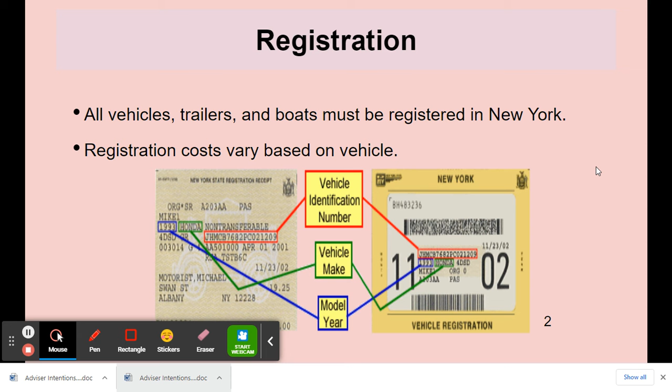All vehicles, trailers, and boats must be registered in New York. Registration costs vary based on vehicle. And I want to say they vary based on location in New York — I think downstate it might be more or less than upstate. Don't quote me on it, but I think I saw that.

Now, this I think is something very important for young drivers, so that they know what happens, what the rules are, and what are the consequences if you allow your vehicle's registration to go out of date. If you are pulled over and have failed to renew your vehicle registration, it is considered a non-moving violation, so you won't get points on your license. Although no points will be applied to your license, you will in fact be fined. There's a fine attached to it.

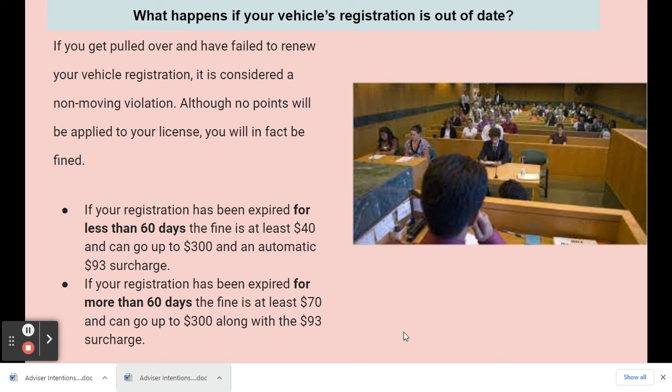If your vehicle's registration has been expired for less than 60 days, the fine is at least $40, and it can go up to $300. And an automatic $93 surcharge will be applied at the court. If your registration has been expired for more than 60 days, the fine is at least $70 and can go all the way up to $300. And again, be aware of the $93 surcharge at court.

Someone may ask, and this would be a great question for you guys in the breakout room, to figure out whether or not you will be charged a $93 surcharge for the court if you plead guilty on your ticket.

I almost want to say that the $93 surcharge is only if you plead not guilty and you go to court. Interestingly, we pay $93 for the service of the court to prove that we're not guilty.

Kind of strange. Okay, New York State inspection. New York requires all vehicles to be inspected yearly. No reminders are sent by the DMV. It's up to you to know when your inspection is due. If you take your vehicle regularly, once a year at least, to a mechanic for a checkup, they often will remind you of this.

You also may take your vehicle twice yearly to your mechanic to change its tires. If you're changing out summer tires or all weather tires to winter tires, that's also a great time for your mechanic to do the safety inspection for your vehicle. He's already there and he's going to have to check out the brakes and so on anyway.

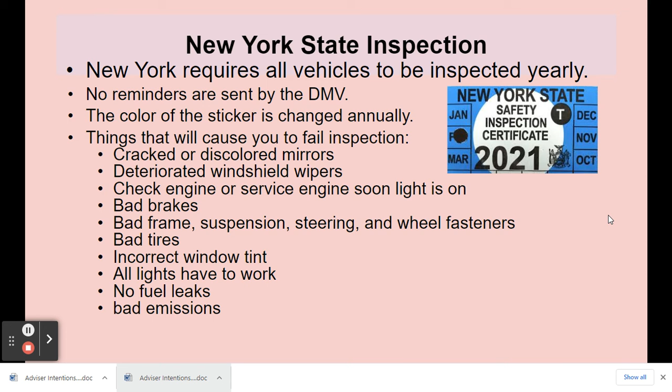The things that will cause you to fail your inspection are cracked or discolored mirrors, deteriorated windshield wipers, check engine or service engine light turns on, bad brakes, a bad frame, suspension problems, steering problems and wheel fasteners, bad tires, incorrect window tint. All lights on your vehicle have to work. It's a great time to get them fixed. No fuel leaks can be allowed, and also they do check emissions, which is a big part of the inspection process.

What are the consequences for not having a current inspection for your vehicle? If the inspection sticker on your vehicle has expired in the last 60 days, you can receive a fine, it says 25 to 50. If the inspection sticker is expired for more than 60 days, it can be between 50 and 100.

We got a little bit of different information, conflicting information here. This definitely is more recent, guys. I actually took this from a law firm, that's where I got this. If there is no inspection sticker, the fine is between $50 and $100. A mandatory state surcharge of $88, or $93 in towns and village courts, is added to the fine. So that's where the difference was. Okay, so $88 is...

City courts. So this would be, well, we can't tell from this picture, but this is what court looks like, guys. So we even have police officers here giving their testimony, and all the other people in the room are either in there for a violation, or they're a relative of someone, or a lawyer for someone who committed a violation, or is charged with a violation, I should say. And of course, here's the judge.

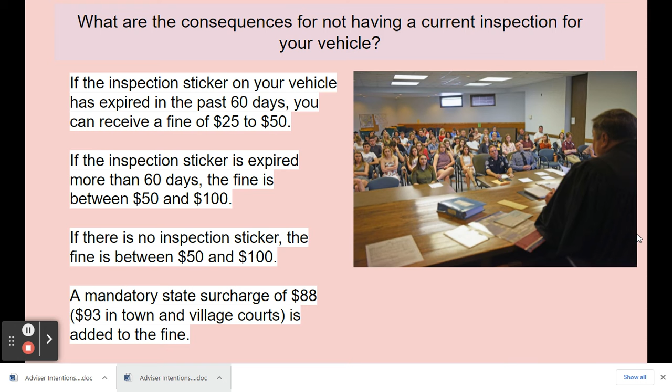What happens if you were given a traffic violation ticket? So, new driver probation, let me just go over really quickly what's going to happen when you get pulled over. So when you get pulled over, the first thing you want to do is signal, use the signal, mirrors, observe, and then go. You're going to pull over to a safe place on the shoulder of the road. You should do this rather promptly.

The officer should not flash his, I don't know what to call those, the police lights, until he or she knows you're going to be in a safe place where you can pull over. He is expecting you to promptly pull over once he does shine those police lights.

When he does pull you over, you must stay in your vehicle. Do not leave your vehicle. I'm telling you the proper etiquette for this. Do not leave your vehicle. Roll down your window when he comes to your vehicle. You do not need to roll down your window beforehand, because it might be bad weather.

He or she, the officer, is going to ask you for two things. They're going to ask you for your license and your registration. You can get these prepared for the officer before he or she comes to your vehicle. The sooner that you have them available for the officer, presumably the sooner you'll be able to go on your way. The officer is always going to ask, do you know why I pulled you over?

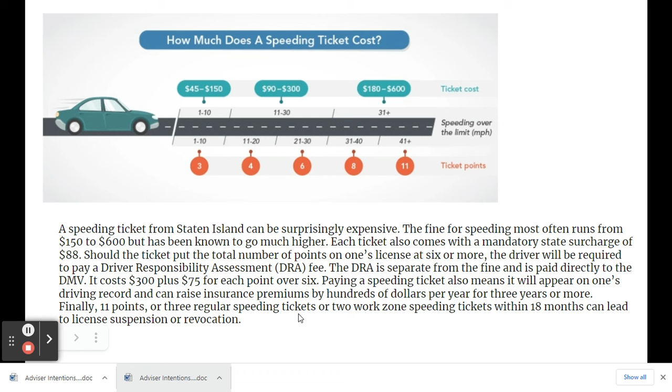For you guys it's different, but once you have your full driver license, which is your aim in this course, 11 points is your max in 18 months. Anything at or over that results in suspension. And it's not in 1 year, it all kind of renews over 18 months, it's a running type thing. So at any point within 18 months that you have 11 points, or 3 regular speeding tickets, or 2 work zone speeding tickets, your license will be either suspended or revoked.

Okay, speeding ticket data from Staten Island, New York. Nearly 20,000 speeding tickets were issued to drivers in the borough of Staten Island in 2018, slightly more than 2017. Police in Staten Island issued the highest proportion of speeding tickets of any New York City borough.

21.7% of all tickets written in 2018 were for speed-related offenses. Among those, 12.7% received companion tickets, for example a second ticket in addition to the speeding ticket. That could be for something like registration being out of date. The most common were for licensing violations, such as driving without a license, equipment violations like having a light out, and disregarding traffic controls.

Approximately one-third of drivers ticketed for speeding are from New York State. The remainder are from out of state or Canada.

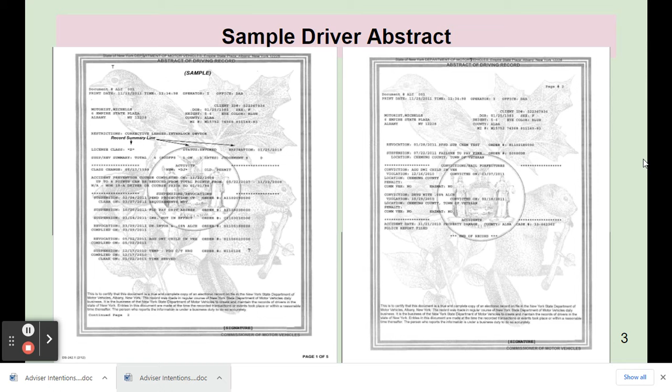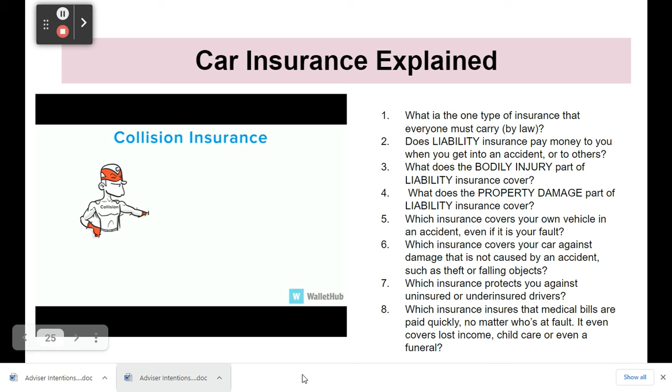Collision insurance protects your own vehicle after an accident, even if you're the one at fault. You will be required to buy it if you use a loan or lease to obtain your vehicle. Otherwise, getting this protection for your own car is your choice.

Comprehensive insurance protects your car against damage not caused by an accident, such as theft, falling objects, or natural disasters. Which insurance covers your own vehicle in an accident? That's collision. Which insurance covers your car against damage that is not caused by an accident, such as theft or falling objects? This is called comprehensive insurance. So it's different than collision.

This has happened to me. I've had a tree fall on my car and do major damage. Collision and comprehensive insurance covered it. The comprehensive insurance part of your package covers this, or theft. This is pretty common in certain parts of the United States, right?

It's usually purchased in combination with collision insurance. And, like collision insurance, you'll be required to get it if you have a loan or lease.

What happens if you're harmed by a driver who doesn't have enough insurance to cover all of your losses? You're out of luck unless your policy includes uninsured or underinsured motorist coverage. This is pretty huge, guys, because there are many drivers out there who are not insured or underinsured. They only have the minimum. If your car is worth more than $50,000, then for New York State, if he's just paying the minimum, he's underinsured. You're only going to get $50,000 for the damage to your vehicle, I believe.

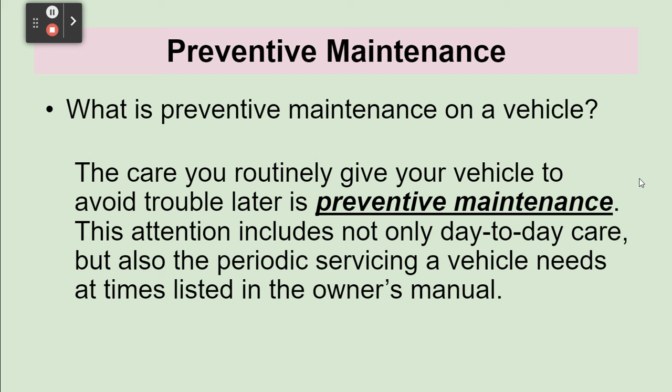Another one is just maintaining good tires. You're going to have to replace your tires, usually after 50,000 miles they are ready to be replaced. Oil changes, for example. So driving costs are affected by how well your vehicle runs. It is true, performing regular maintenance can ensure more efficient operation and help prevent costly repairs down the road.

So keeping your fluids clean and topped up: your engine oil, engine coolant, brake fluid, transmission fluid, and power steering fluid, they all need to be maintained. Gasoline, I always keep my gas tank between full and halfway, and once it gets to halfway, I fill it back up. Use gasoline with the octane rating recommended by your vehicle manufacturer. Again, check your owner's manual for that. My two vehicles, believe it or not, take 87 octane.

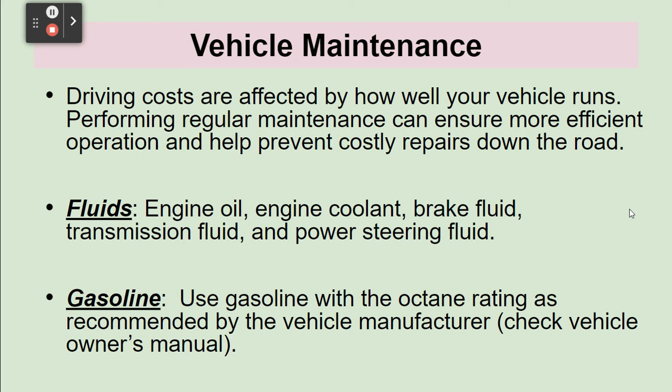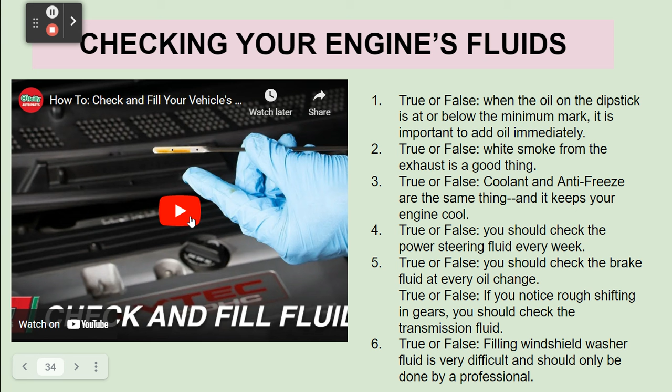And then we're going to watch this video. It's very good for giving us an idea of all the stuff that needs to be taken care of. However, most of the stuff, guys, I mean, they're kind of telling you how you can do it yourself. These are all things that we want our mechanic to do for us.

Hey everybody, Jeremy here from O'Reilly Auto Parts to talk to you about how to check and fill your vehicle's fluids. Checking fluids on a regular basis is an easy way to help ensure the longevity and reliability of your vehicle. Most owner's manuals will show you where these fluids are located under the hood, as well as recommending specific fluid types and service intervals. As always, if you're not completely comfortable doing this yourself, we'd be happy to recommend a professional technician in your area. Let's start by looking at engine oil.

Besides fuel, it's probably the most important fluid in your vehicle. Motor oil lubricates engine components and keeps everything going smoothly. It's a good idea to check it once a month, or more often if you suspect a leak or another issue. Your vehicle's manufacturer will specify the recommended oil weight and change service interval for your vehicle.

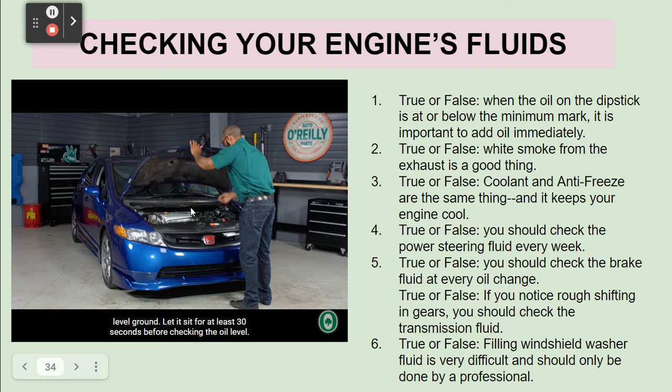Make sure your vehicle is turned off and sitting on level ground. Let it sit for at least 30 seconds before checking the oil level. Most vehicles have a dipstick under the hood that you'll use to check the level of the oil. Once you find the dipstick, slide it out and wipe the excess oil off the end with a shop towel.

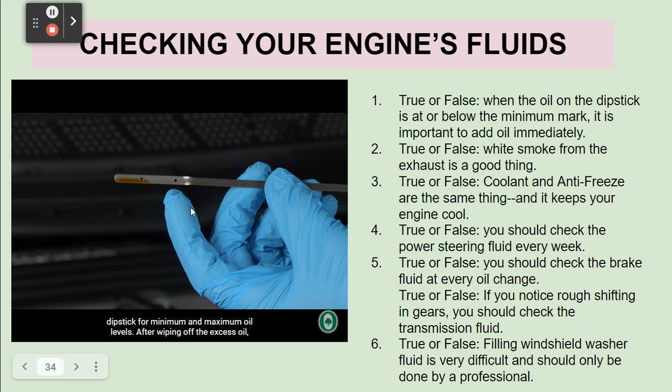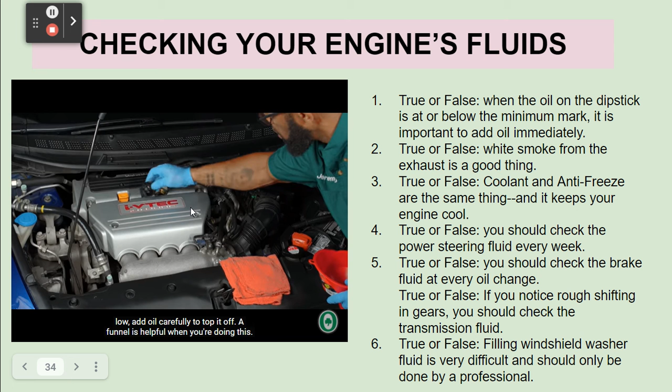You should see markings or other indicators on the dipstick for minimum and maximum oil levels. After wiping off the excess oil, reinsert the dipstick all the way, then pull it back out to see what the oil level is. The oil should be reading close to the maximum marking. If it's a little low, add oil carefully to top it off. A funnel is helpful when you're doing this. Make sure you're adding where the oil fill cap is removed, not the dipstick tube.

Add a few ounces at a time and recheck it to make sure you don't overfill it. If your level is at or below the minimum mark, it's important to add oil immediately. This could be an indication that your vehicle is leaking or burning oil. You should seek the help of a professional to prevent further damage.

Also, take note of the texture or color of the oil. Get some between your fingers. It should be slick and smooth in a yellow or amber color. Grittiness or particles in the oil can indicate that components are wearing down, which is a major issue.

If you notice a milky color, check to see if there's any condensation on the inside of the cap. If there is, it could be an indication of moisture that hasn't been burned off. But it could also mean that coolant is leaking into the engine oil, which is a more serious situation. Other indications of this can be brownish coloration in the coolant reservoir or white smoke from the exhaust. If any of those symptoms are present, you should have your vehicle towed to a shop to avoid damage to your engine.

An engine produces a lot of heat, and your coolant, also known as antifreeze, is what keeps things cool. It does this by absorbing engine heat and allowing it to dissipate through the radiator, which keeps your vehicle from overheating. It's recommended you check your coolant level with each oil change.

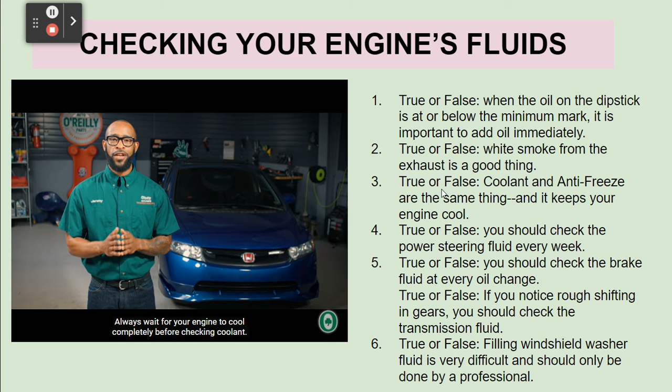Always wait for your engine to cool completely before checking coolant. 2 to 3 hours is safe if you've been driving. Even though some reservoirs will give an accurate reading whether the coolant is hot or cold, pressurized coolant can spray and cause burns. To check the level, you'll usually see a tank that has minimum and maximum marks on it.

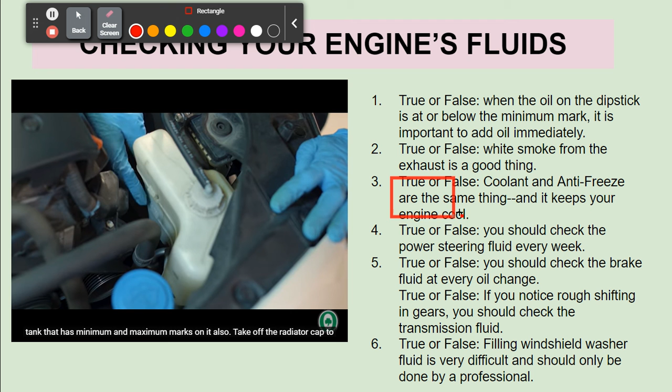Also, take off the radiator cap to make sure it's filled to the top. Only add coolant that's specifically approved by your vehicle's manufacturer. And if you suspect a leak, have your vehicle diagnosed by a professional as soon as possible.

In most cases, a necessary element of steering is power steering fluid, although there are some vehicles that have electrically assisted steering that requires no fluid. It's a good idea to check your power steering fluid at every oil change, and change it as often as specified by your vehicle's manufacturer.

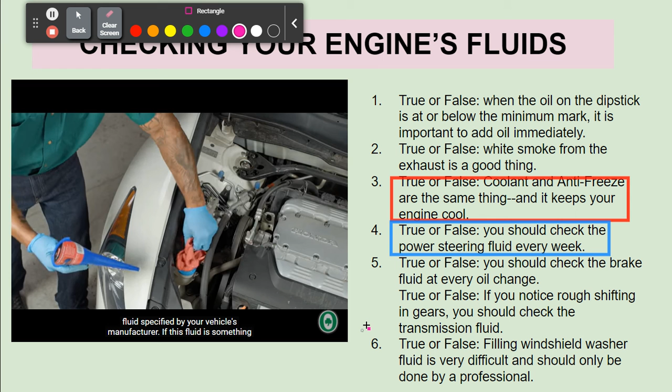Similar to other fluids, you'll usually find a reservoir or dipstick in the engine bay. Check the reservoir or remove the dipstick to check the reading, and top it off if necessary. To avoid causing damage, only use the type of power steering fluid specified by your vehicle's manufacturer. If this fluid is something you're having to add regularly, you probably have a leak. Have the problem looked at by a professional technician to avoid steering problems and safety issues.

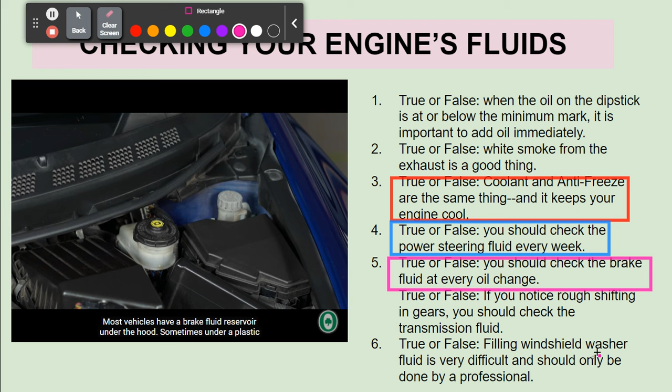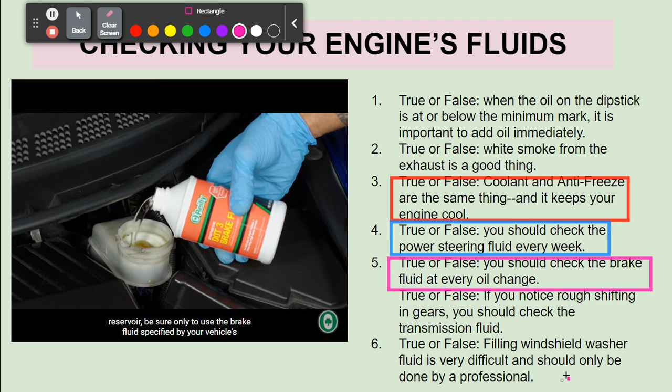Vehicle brakes are hydraulic, which means they require fluid to function properly. Outside of any brake issues, it's beneficial to check your brake fluid level at every oil change. Most vehicles have a brake fluid reservoir under the hood, sometimes under a plastic cover near the bottom of the windshield. Just make sure the level falls between the marks for minimum and maximum. Also, if you can't see through the fluid, if it's dark or cloudy, it needs to be replaced. If you're adding to the reservoir, be sure only to use the brake fluid specified by your vehicle's manufacturer.

If your vehicle has a manual transmission with a hydraulic clutch, you'll want to check your clutch fluid level at each oil change. Your clutch fluid reservoir is typically located near the brake master cylinder toward the back of the engine bay. Specific locations should be in your owner's manual. The fluid level should fall between the markings for minimum and maximum levels.

Some older vehicles may have metal reservoirs that require you to remove the cap to see the level. Hydraulic clutches use the same type of fluid as hydraulic brake systems, so if you do need to add fluid, only add fluid that meets the DOT specification recommended by your vehicle's manufacturer. In our case, no additional fluid is needed.

Transmission fluid serves to cool and lubricate components like gears, clutches, and valves inside your transmission. Some vehicles come with transmission fluid that isn't intended to be changed. Other vehicles will recommend changing the fluid every 30,000 to 100,000 miles. But if you're having transmission issues like rough shifting or surging, start by checking the fluid. In some cases, you'll find a dipstick. Others will require a professional technician. Always follow the procedures specified by your vehicle's manufacturer for checking transmission fluid.

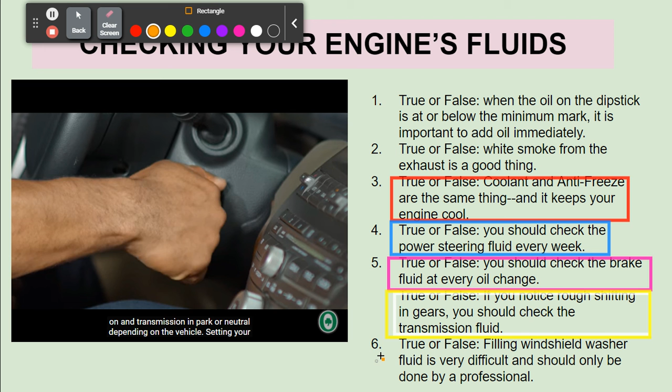If your vehicle has a dipstick, the process will be similar to how you've checked other fluids, but there are a few differences. When you check the transmission fluid level, you'll want to have your engine turned on and transmission in park or neutral, depending on the vehicle. Setting your emergency brake and chocking your wheels is a good idea for this procedure. But before checking the dipstick, put your foot on the brake and use your gear selector to cycle through all the gears with the vehicle idling. This will allow a more accurate reading.

The fluid should feel smooth and be amber or red in color. Fluid that's dark, cloudy, or gritty indicates a problem that requires professional attention.

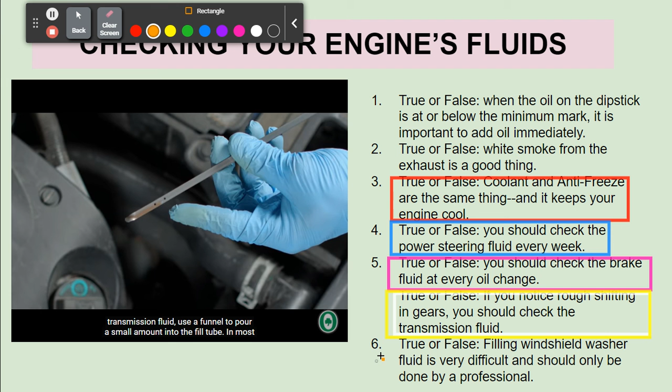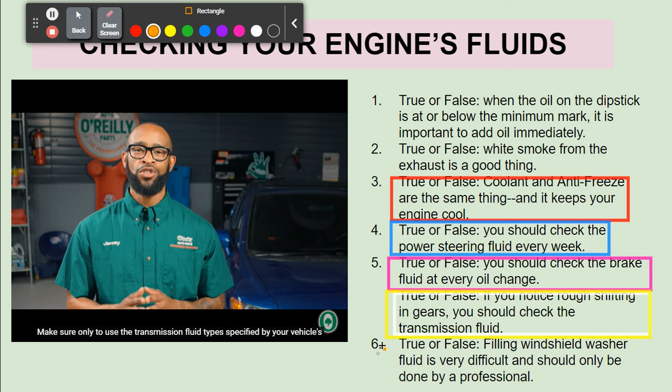If you need to add transmission fluid, use a funnel to pour a small amount into the fill tube. In most cases, topping off this fluid won't require more than a pint, so add a small amount at a time. It's very important not to spill any outside the tube. Transmission fluid can ignite if it makes contact with the hot manifold. Make sure only to use the transmission fluid type specified by your vehicle's manufacturer.

Put your foot on the brake and cycle through all the gears again. Recheck the dipstick to make sure the fluid is at the right level. Make sure when you're done to replace the dipstick securely. Some will latch or lock into place.

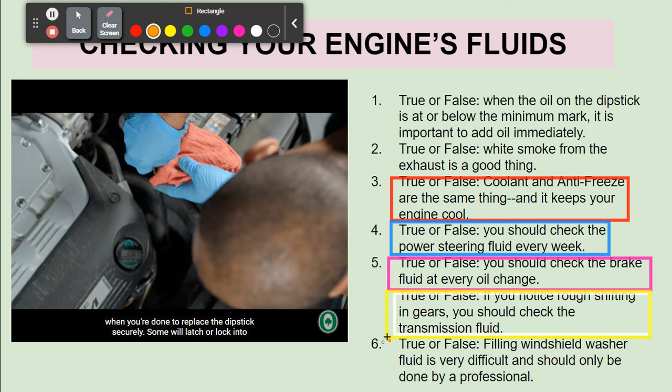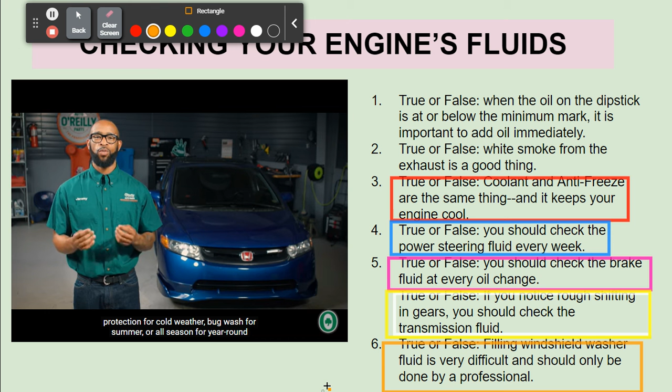Even though it isn't necessary to your vehicle's performance, windshield washer fluid is an important part of driving safely, and it's probably the easiest fluid to maintain. There are several varieties to choose from: freeze protection for cold weather, bug wash for summer, or all season for year-round visibility. The reservoir should be easy to find, and all you have to do is pour fluid in until it's full. Most vehicles will only have one reservoir, even if there's a rear wiper, but in some cases you'll find a washer fluid reservoir in the rear also.

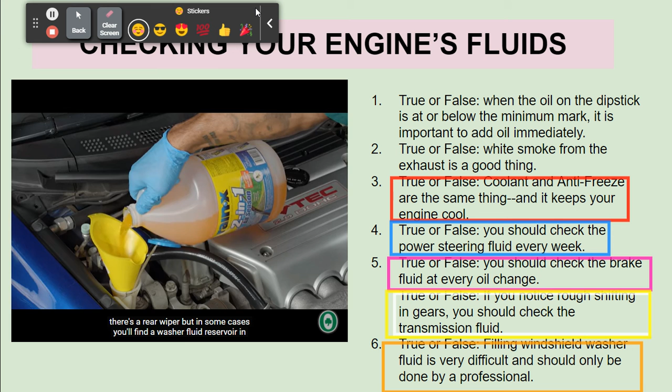Okay, so very quickly, I'm going to put a little sticker next to the ones that we should be able to do ourselves, okay? So we talked about these when the oil on the dipstick is at or below the minimum mark, it is important to add oil immediately. Yes, if it's below the minimum mark, you don't want to be driving anymore with that vehicle. You either need to do it yourself or you need to bring it to a mechanic to add oil, okay?

But can you check your oil dipstick? Yes, okay? And if you go to, especially like New Jersey, where you can't fill your own gas anyway, I believe this is a service that is automatically provided. When you have someone filling your gas, they can also check your oil levels by taking a look at your dipstick. Okay. So, and ideally, you would want them to actually show you where the level is so that you know yourself. All right, so something you should be able to do yourself. I'm going to put a little happy face next to it.

True or false, smoke from the exhaust is a good thing. That is false. I don't think we have any sad faces, so I'm not going to do that anyway. True or false, coolant and antifreeze are the same thing, and it keeps your vehicle engine cool. Correct, that is true. True or false, you should check the power steering fluid every week. False, you should have it checked every time you have your oil changed. True or false? True. You should check the brake fluid at every oil change.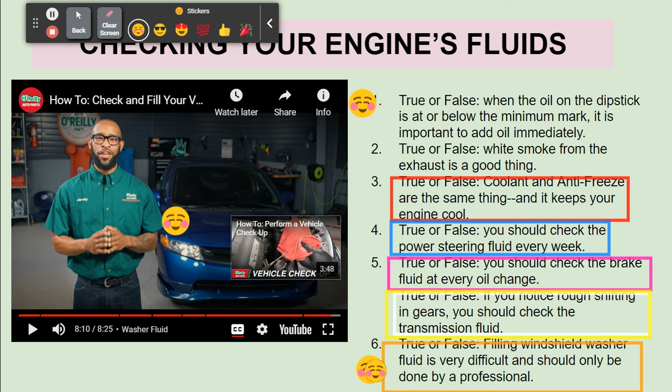True or false? Filling windshield washer fluid is very difficult and should be done by a professional. That is false. I'm going to put a happy face there because it's something you should be able to do. You should be able to check your oil, and you should be able to check and fill your windshield washer fluid.

Here we go. Oh boy, here they are. They're still there. All right, let's see how I get rid of them. Eraser time.

Vehicle maintenance, right? So we have air filters, belts, and hoses. Again, this is something your mechanic is going to take care of when you bring your car in for an oil change. They should be going through all of this stuff. If it's not included in the oil change, go to a different mechanic.

I typically go to an express lube of some sort, called Express Lube or Jiffy Lube. These are places where they will do all this within 15 minutes. They'll do all these things while they work on your car.

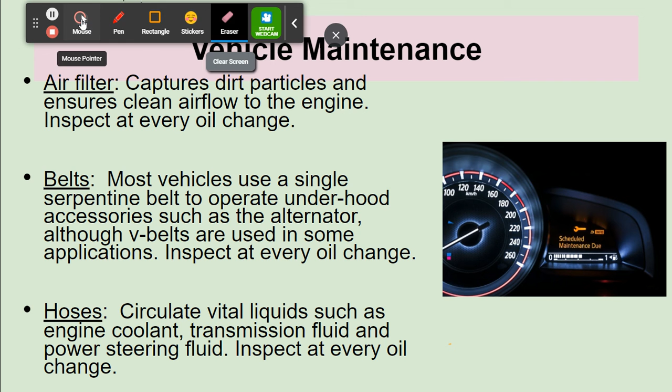Yep, they'll check your battery too, and they'll check your tires. But I've never had a situation where they've actually told me it's time to get new tires. They will inflate the tires to the proper pressure, though.

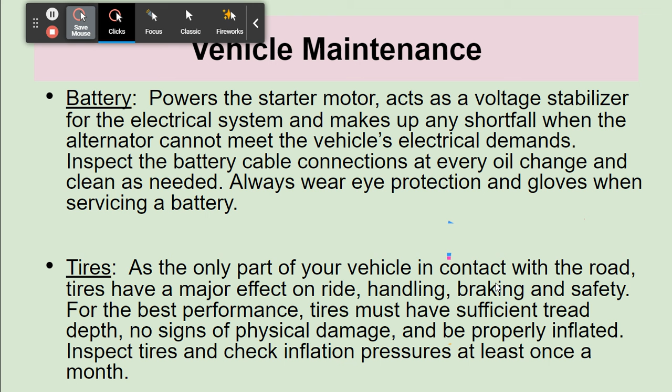And remember, when they're doing this, that pressure is supposed to be for your cold tire pressure, not after driving the car for 5 hours. So try to do this early in the day, whether you take it to a Jiffy Lube or to your mechanic. Okay, let's move along.

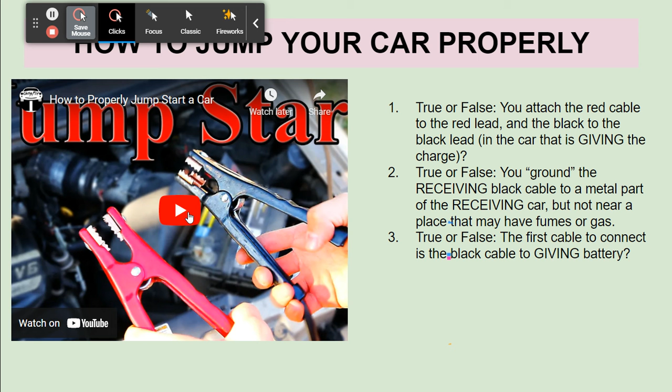Okay, and jumping your car. This is the last part for today's lesson, and everything else covers the parts that are in the quiz and the most important parts of today's lesson. I know we're running into the hour and a half mark at this point, so we're going to watch this and then answer the questions, and we're done.

Hey guys, Chris Fix here. Today I'm going to teach you the proper way to jumpstart your car if your battery's dead. It's happened to all of us: you leave your headlights on, your battery drains for some reason, and you need to jump it. In my '95 Ford Windstar, the battery's dead, just because it's 7 years old and pretty old. Batteries last about 4 years on average.

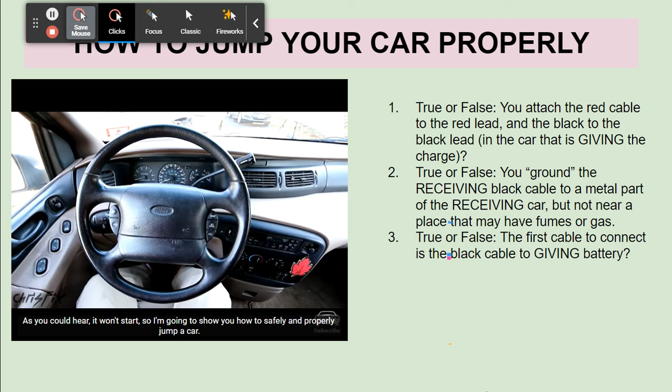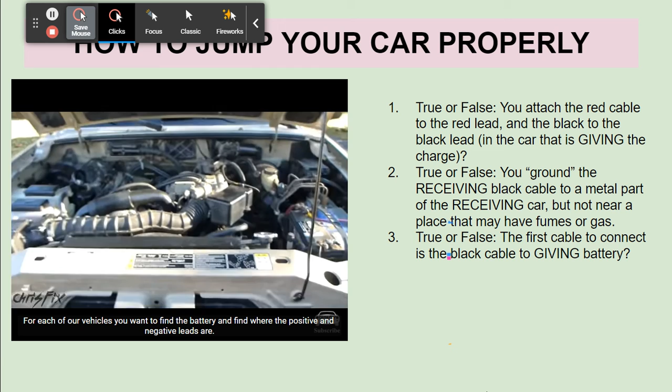As you can hear, it won't start, so I'm going to show you how to safely and properly jump a car. The first step is to get a car that runs and pull it up to the car with the dead battery, so the jumper cables can reach both batteries. Make sure both cars are separated and don't touch each other, and take the keys out of the ignition for both vehicles. For each vehicle, find the battery and find where the positive and negative leads are.

This is my truck battery, the one that works. Here's the positive, it's red, and here's the negative, it's black. Now if we go over to our van, which is not starting, we can look at the battery, and you can see the black cable is our negative, and this one is our positive, the red cable. Once you identify that, we can begin.

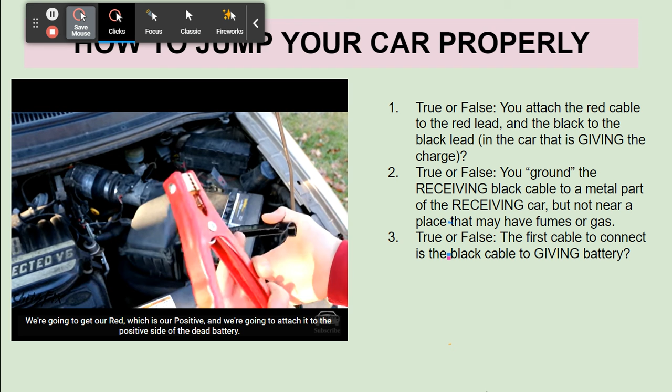Now take your jumper cables and spread them out, so you have one red and one black in each hand, and detangle the wires. Here's the dead battery in our van, and we'll take out the jumper cables. From this point forward, we don't want the jumper cable ends to touch each other. First, we're going to take one side of the jumper cables, get our red, which is our positive, and attach it to the positive side of the dead battery.

You want to make sure you get a good connection right on that battery post. You can see that these copper pieces are touching the metal on the post, and there's a good connection. If you want, you could wiggle it around a little bit, just to make sure you get it in there good.

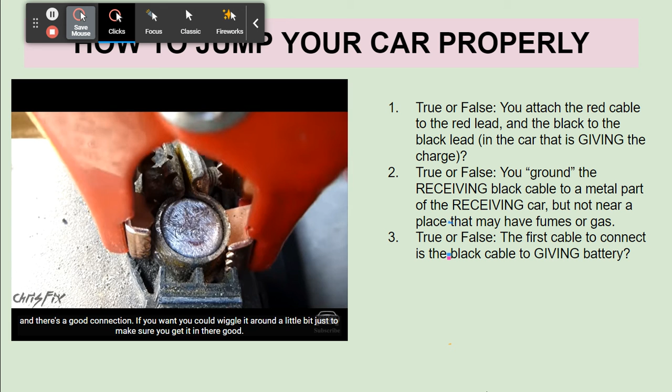The reason why you attach the red cable to the dead battery first is because the dead battery doesn't have as much energy as the good battery, so starting here is the safest. You could take your ground and just put it on a piece of plastic. You don't want your ground touching any bare metal, because then you'll be grounding it out. You could just leave it there for now, we're going to connect it to the battery in a second.

Now we're going to go over to the good battery. We're going to grab both of our leads just like we did before. Don't touch them together. We're going to take our red one and put it on the positive terminal, which is also red. At the good battery, we're going to get our black lead and attach it to our negative side here. Now we have the black lead and the red lead on the good battery attached.

Back at the dead battery, this is the last lead we have to attach, but you aren't going to attach it to the negative battery terminal. Touching the lead to the negative battery terminal will cause a spark, and these sparks can ignite any fumes from the battery and cause an explosion. Batteries could create hydrogen gas, especially when they're run down and not working properly, and hydrogen gas is explosive, so to play it safe, just find another grounding point.

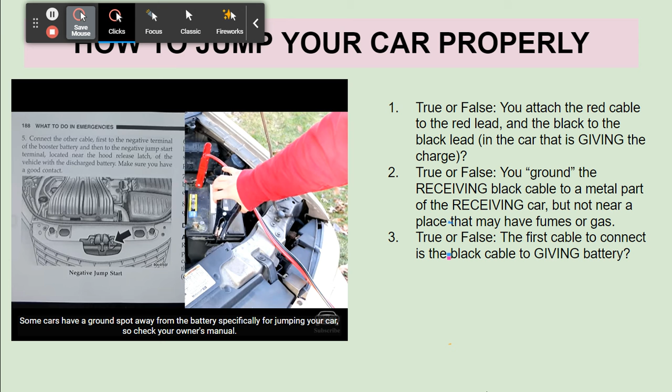Some cars have a ground spot away from the battery specifically for jumping your car, so check your owner's manual. If not, find a bare piece of metal for a ground that isn't a moving part and that isn't attached to an electrical component. So when looking for a ground, you want to try to find something that's bare metal.

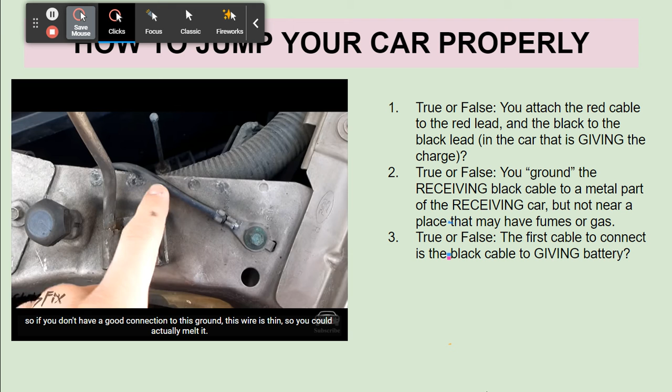If we look here, there's a nice ground here, but unfortunately this wire is pretty thin. So if you don't have a good connection to this ground, since the wire is thin, you could actually melt it. A good spot to look is on the engine.

When we're looking at the engine here, here's a nice bare piece of metal. My only problem with this bare piece of metal is that it's right next to the fuel pressure regulator, and we're trying to avoid sparks next to anything flammable, so this isn't a spot that I would want to use. But it's nice because it's a thick piece of bare metal, directly connected to the engine, so you get a good ground.

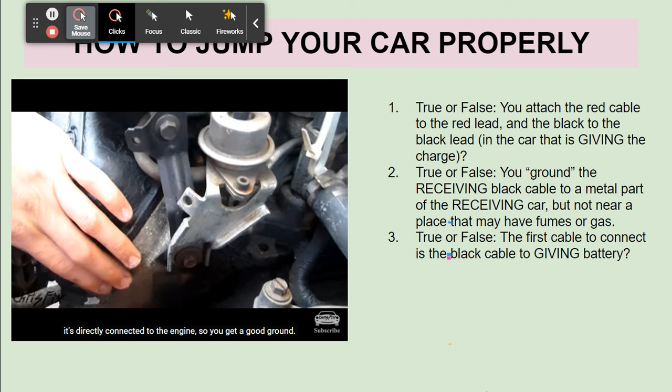In my case, what I'm going to do is go find the strut tower, and as you can see on my strut tower, there's a bunch of good bolts that provide a good ground, and they're also bare metal. So we're going to attach it to that. The other good thing is this strut tower is away from the battery, so we don't have to worry about sparks. But there's tons of grounds you could use—in this case, this is just one of them. Just get in here and clamp right down onto that, and make sure you have a good connection.

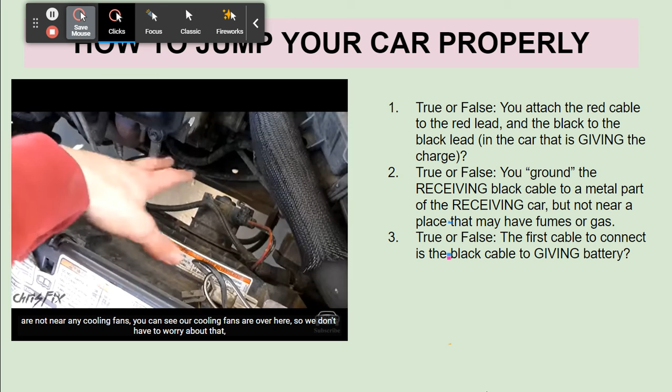So with our cables all set up, one last thing you want to do is inspect to make sure that these cables are not near any cooling fans. You can see our cooling fans are over here, so we don't have to worry about that, and our serpentine belt is on the other side, so we don't have to worry about that either. Now that our cables are clear, let's check the other side. Moving to the good battery side, the fan is right here, as well as the serpentine belt, and our cables are out of the way over here. So we're ready to jump the vehicle.

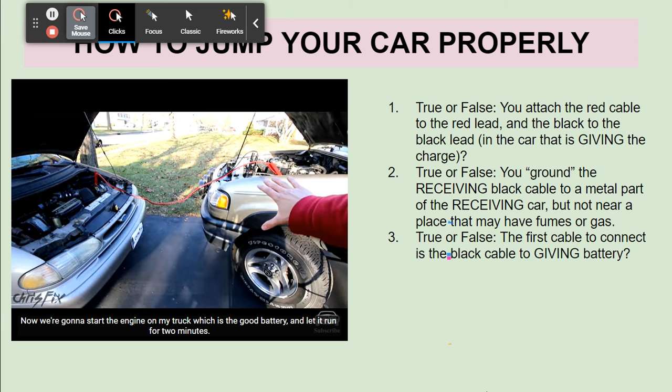Now we're going to start the engine on my truck, which is the good battery, and let it run for 2 minutes. My truck's been running for about 2 minutes, so we're going to start the engine in my van. Hopefully it'll start up.

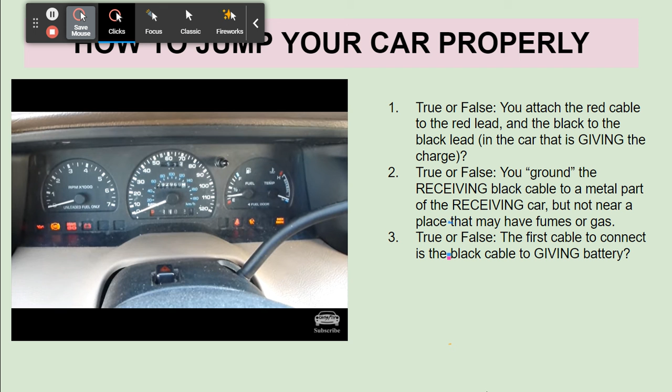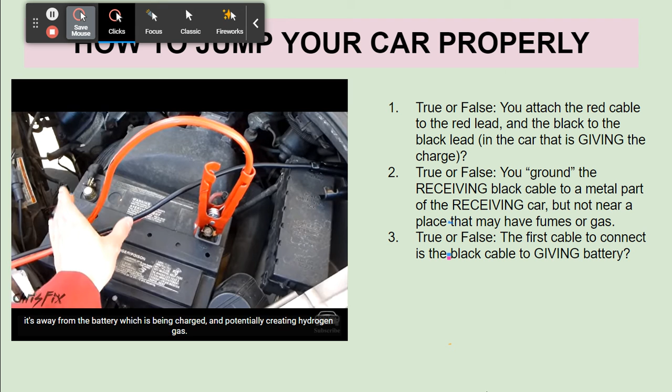Now, right away, you want to take off the negative terminal first. If I take this off and it sparks, it's away from the battery being charged and potentially creating hydrogen gas. If we take off the red terminal first, we could create a spark right on top of the battery, which wouldn't be good.

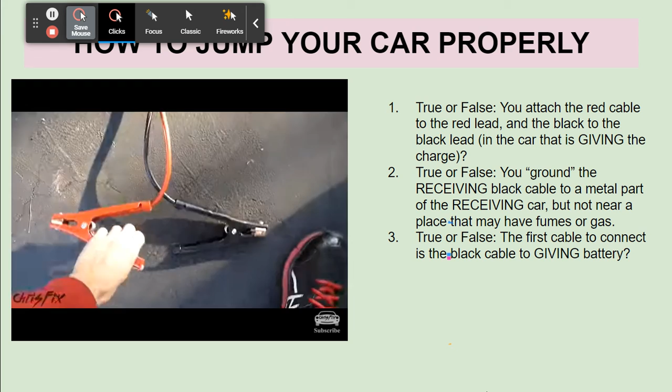So we'll remove the negative terminal first. Don't let this touch anything. Then we'll remove our positive terminal on the bad battery. Make sure these don't touch. Then you remove the red cable and then the black cable. And now your car is started, so you're not stranded anymore.

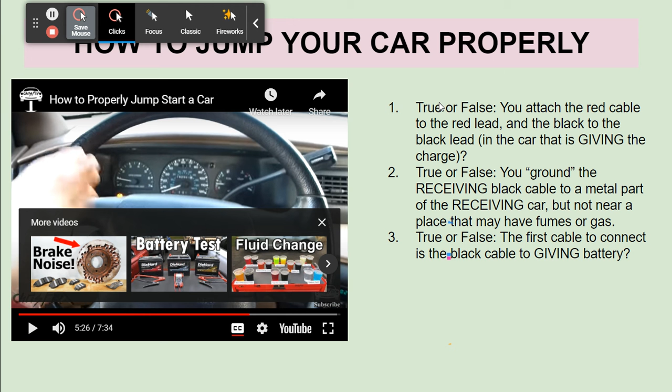So let's give a scenario. True or false: you attach the red cable to the red lead and the black cable to the black lead in the car that is giving the charge. That is false. First we need to attach the red cable to the receiving battery first.

Well, let's just make sure. We'll double check right now. Okay, and here we are. You can see right here, black cable, that's our negative, and this one is our positive, it's our red cable. So once you identify that, we could begin.

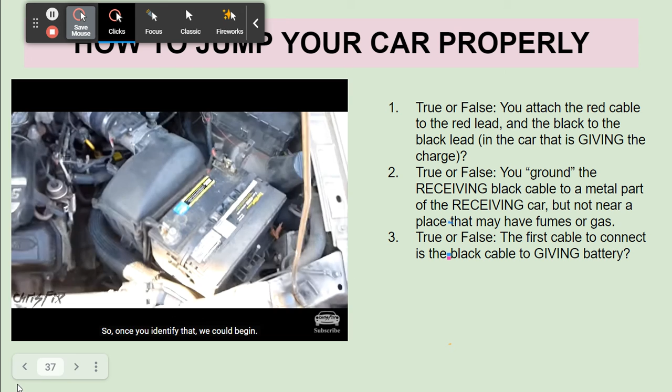Now you're going to want to take your jumper cables and spread them out, so you have one red and one black on each end, and just detangle the wires. Here's the dead battery in our van, and we'll take out the jumper cables. From this point forward, we don't want the jumper cable ends to touch each other.

The first thing we're going to do is take one side of the jumper cables. We're going to get our red, which is our positive, and attach it to the positive side of the dead battery. So we're doing the red first, so this answer is false.

Number 2: you ground the receiving black cable to metal parts of the receiving car, but not near a place that may have fumes or gas. That is true. Remember, he attaches it underneath, he finds some place.

And number 3, true or false: the first cable to connect is the black cable to the giving battery. I don't know why I'm kind of asking this twice, but that is false. On the other side, let's take a look.

You want to make sure you get a good connection right on that battery post. You can see that these copper pieces are touching the metal on the post, and there's a good connection. If you want, you could wiggle it around a little bit. Just to make sure you get it in there good.

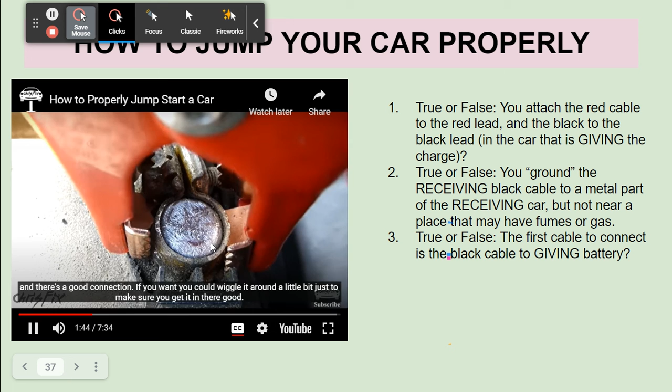Good. The reason why you attach the red cable to the dead battery first is because the dead battery doesn't have as much energy as the good battery. So starting here, then you'll be grounding it out. You can just leave it there for now, we're going to connect it to the battery in a second.

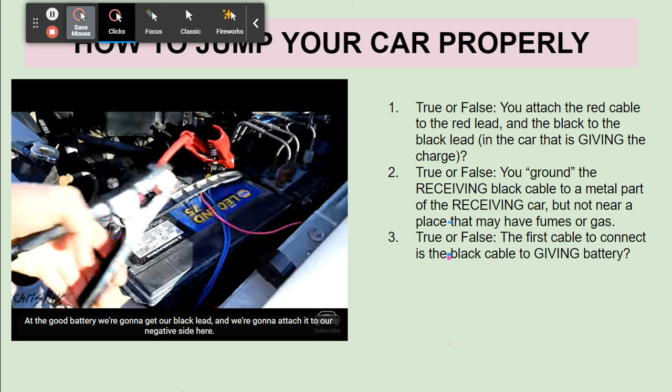Now we're going to go over to the good battery. We're going to grab both of our leads just like we did before. Don't touch them together. We're going to take our red one and put it on the positive terminal, which is also red. Red goes with positive, black negative. We're going to get our black lead and attach it to our negative side here. So we'll attach this here.

Okay, so he said we're going to attach our red first, so let's say false on this and see if there's a reason for that. Now we have the black lead and the red lead on the good battery attached. Back at the dead battery, this is the last lead we have. Kind of a weird question: the first cable to connect is the black cable to the giving battery. That is false. Okay, we're going to bring this to an end now.

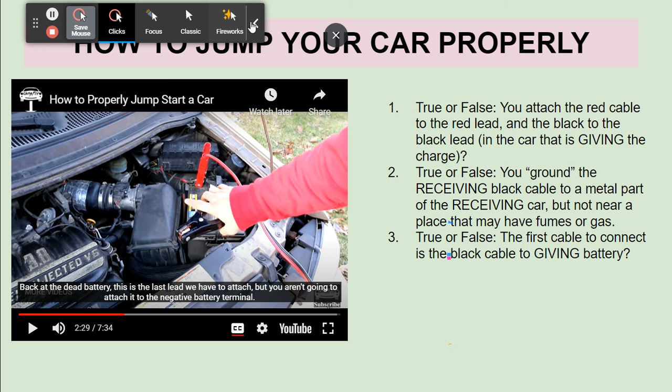So I believe we've gone, I think, over the 90-minute mark at this point. So with all that being said, I'm pretty sure there's not much more to our video anyway.

On tires. Yep, we did tires already. Okay. But I do want to stop it at the 90-minute mark, and I think we're right there right now. I didn't look, but I'm pretty sure.